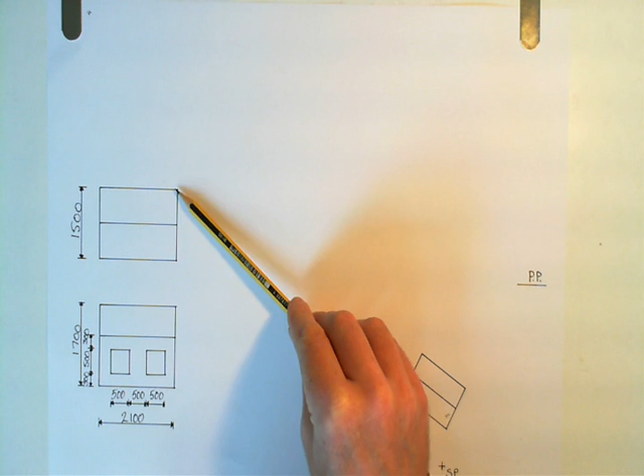So what we've got is a child's playhouse here, 1700 millimeters tall, 1500 millimeters from front to back, and 2100 millimeters from left to right. It's also got a couple of windows on the front, and it's got a gutter which is at 1100 millimeters above the ground. So what we've got over here, this is where we're going to draw our measured perspective.

We've got this here, this is called the spectator point. That's where the observer would be standing if they were looking at the building. So they're standing here, and this is a plan view of the building. They're looking at that corner, looking in on this corner here. And we're going to draw here what that person is going to see in reality.

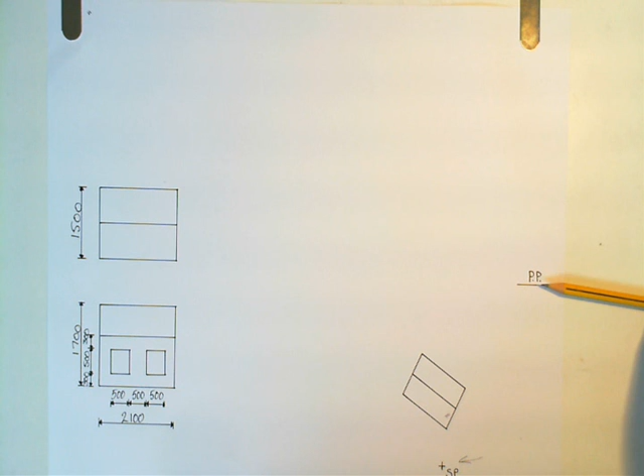We've got a point here called PP, that stands for picture plane. That's probably the most important line on the drawing. That's where all our change in direction is going to occur.

So the first thing I'm going to do with that is extend it all the way along. I take the pencil and extend it along there. It's like a bounce line - there are lines which are going to hit this, and then they're going to go and head vertical up the way or vertically down the way.

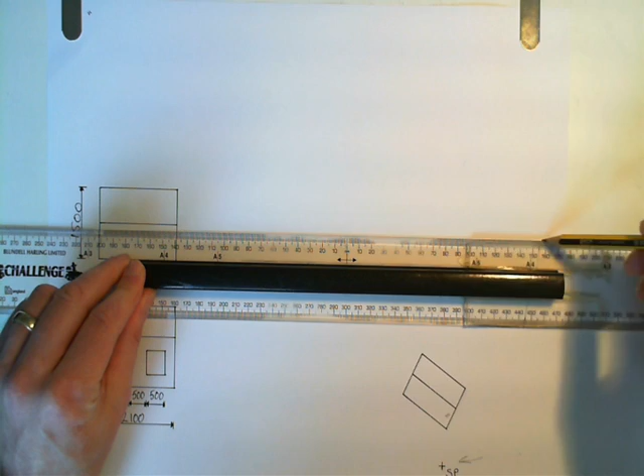Now what I also need is a ground line that I can measure from, and I need a position where my eyes would be. The ground line can be anywhere - it could be up there, it could be further down towards it, but in this case I'm just going to move up a couple of centimetres and draw a line to represent the ground line. Put a GL for ground line.

And the next position that I need is where the eyes are going to be. Now the distance between the ground line and the eye level is quite important - it has a big effect on what the finished drawing is going to look like. In our case we're going to say that the eye level is 1 metre above the ground line.

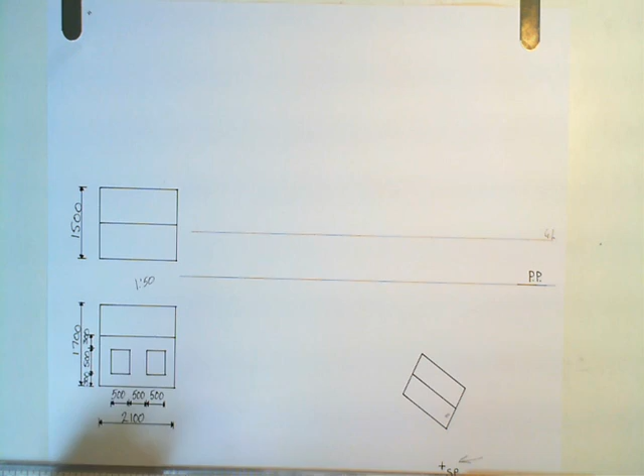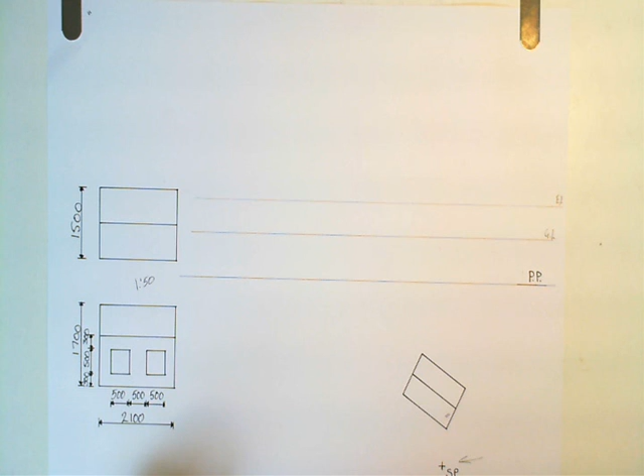This drawing is on a scale of 1 to 50, so what I've got here is a scale ruler with a 1 to 50 scale on it. This is our 1 to 50 here. I've said that the eye level is going to be 1 metre above the ground, so I'm looking for that position. I put my ruler on here, put a little dot at 1 metre, and continue that across the page. And this is my eye level. I know it's a little bit bitty to begin with, but we'll get there.

Here's our house. It's got a side going in that direction, and it has a side going in that direction. They will be two specific angles, and in this case that one is at 30 degrees, which means that this one must be at 60 degrees.

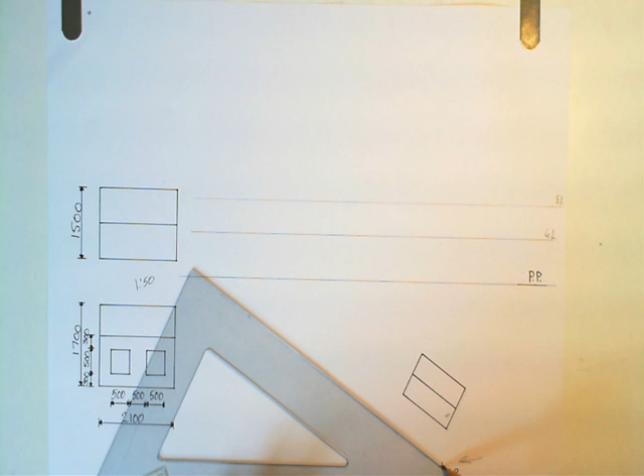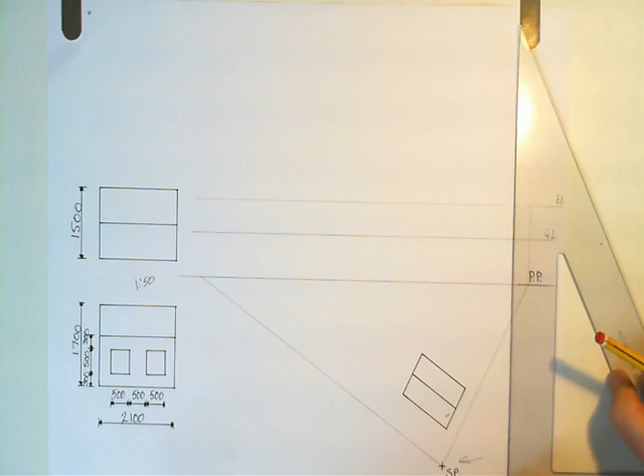First thing I'm going to do is go to the spectator point, very carefully draw a line from there till it hits the picture plane, parallel with the edge of the house. Then go to the other side, spectator point, draw a line till it hits the picture plane, parallel with the edge of the house. Then turn, and I'm going to go vertical through there, and vertical through there. This point here now becomes vanishing point 2, and that point there becomes vanishing point 1.

So we have our two vanishing points, which is familiar since we've used them before. The next thing we're going to do is take height lines, because these are measured perspective drawings, so it's important that we get heights right. We're going to take lines along the edge of the building and fix our heights based on that. It's a bit difficult to grasp, but if you stick with it, it's a routine that works time and time again.

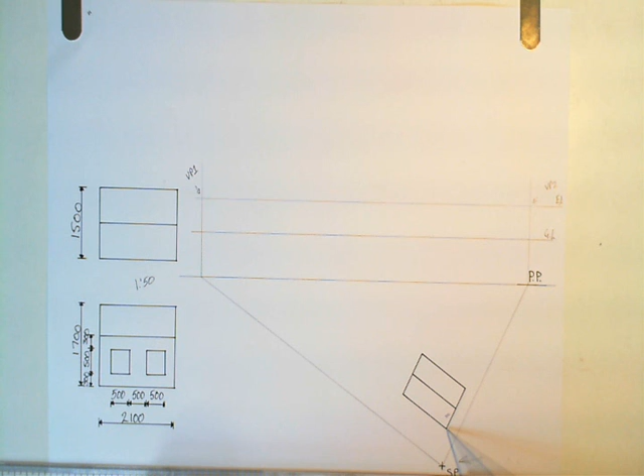The most important of these two height lines is the one that goes along this wall, because that fixes the height of the gutter, the pointy roof which is a little higher, and the gutter at the back. So I'm going to take a line very carefully, touching the edge of the building, hitting the picture plane again, then turning it round along the edge of the building until we hit the picture plane.

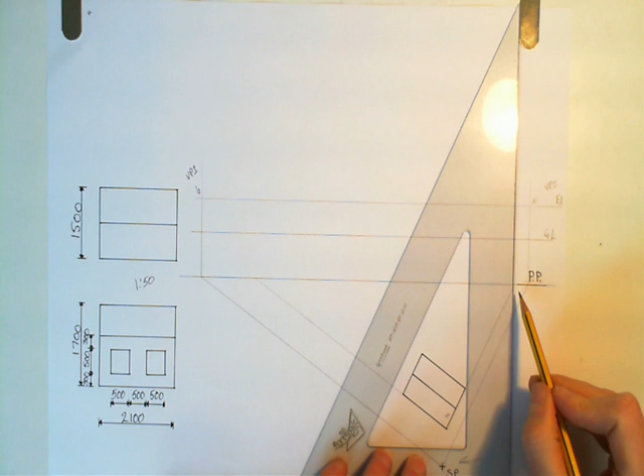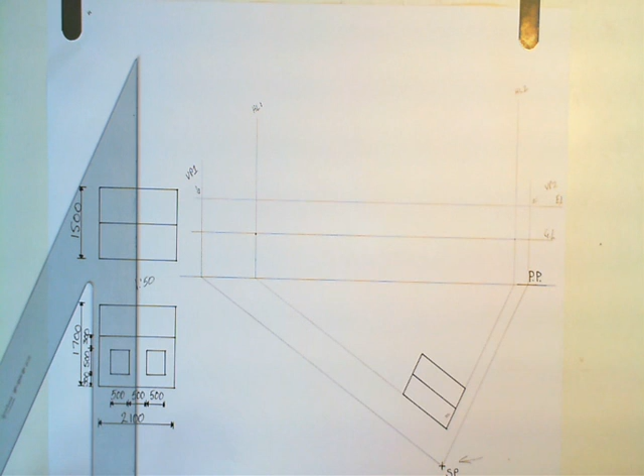Turn my set square round, and once again go vertical. And over on this one, where it cuts the picture plane, go vertical as well. This is ground level here, that's the ground line. This is called height line 1, and this one is height line 2. Height line 1 works with vanishing point 1, height line 2 works with vanishing point 2. You don't mix and match them.

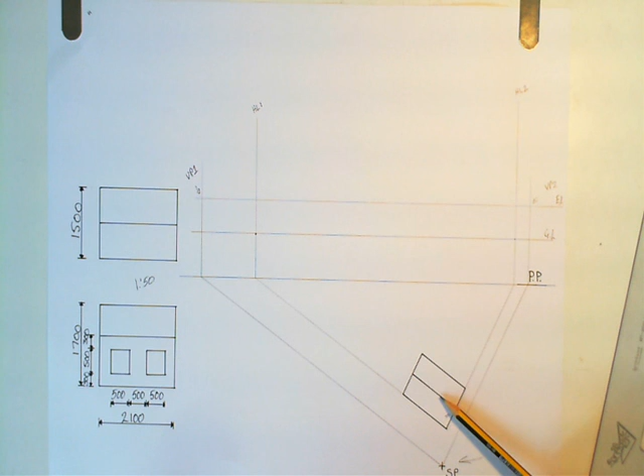The next thing I'm going to do is take these heights which are marked here. The most important ones are the ground, the gutter, and the top. On this height line, it would touch the ground, the gutter, and the top. Notice that this height line along here wouldn't touch the highest point of the building, so that isn't any good for fixing the high point. This other height line does touch it, at that point, so we can use that one.

So I'm going back to my scale rule again. I know the full height of the building is 1,700 millimeters, so I go to my scale rule, set it to the 1 in 50 scale, set it at 0 on the ground line, and then go to 1.7 meters, which is there.

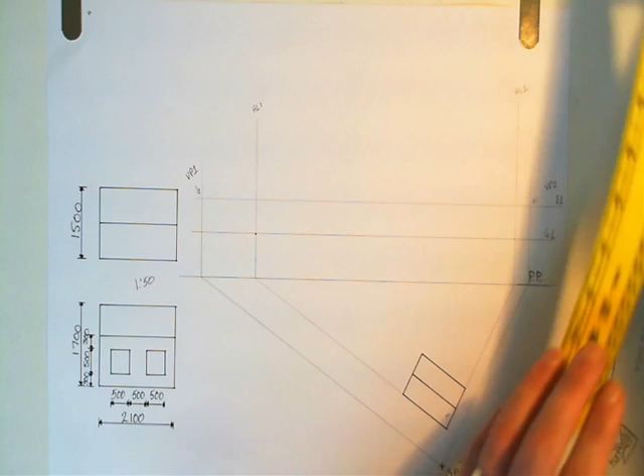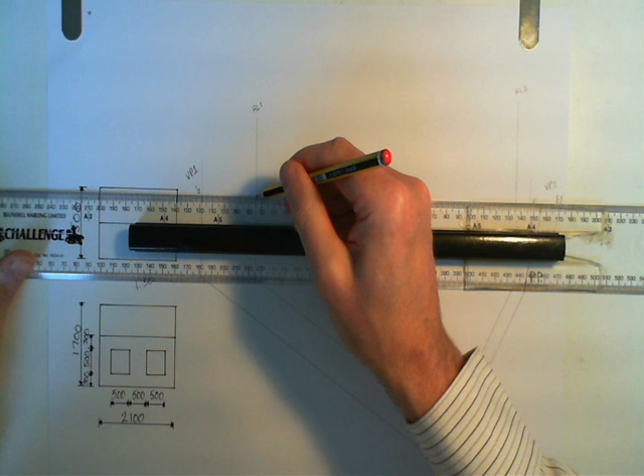I also need 1.1 meters, which is the gutter height. So again, I put my ruler back at 0 on the ground line and go to 1.1 meters, which is just there. Now, to make sure I'm maintaining accuracy, I'm going to transfer that height across from height line 2 to height line 1, instead of measuring, to make sure I get it accurately.

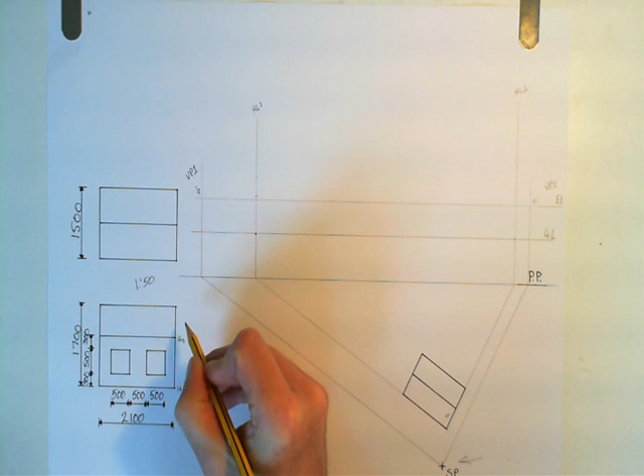Now I could say that this is height 0. I'll skip the bottom and top of the windows, and call them 1 and 2, which makes this height 3 and height 4. So I'm going to mark that on here: that's height 0, height 3, and height 4.

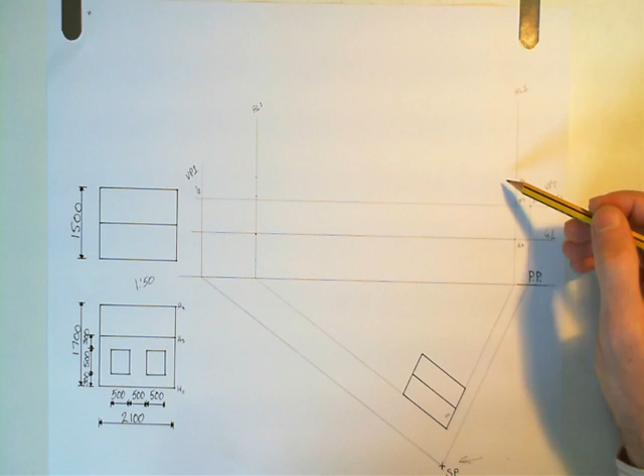Okay, now you just have to try and follow what's going on here. I'm going to vanishing point 1, and I'm going to shoot a construction line from there through the ground line and down into this space. I'm then going to shoot from the vanishing point through that position and off into space here, and from that position through height 4 and off into space there. So I'm beginning to project my lines out in this direction.

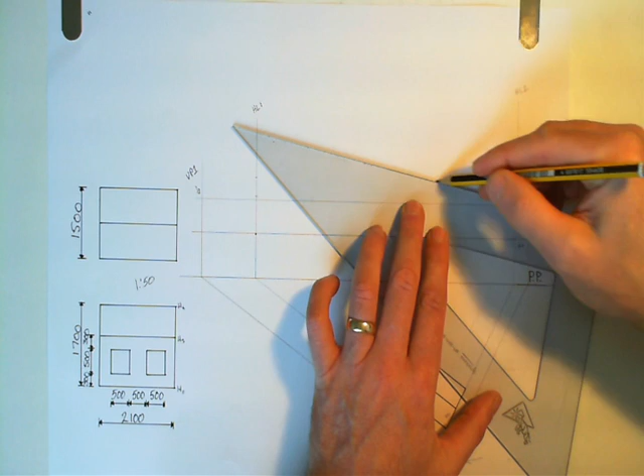Again, I have to be incredibly accurate—even a pencil's point thickness will make a difference. Don't worry if it goes across into the plan, it's just a construction line. Again, being very accurate, across into space, and once again off into space there. So this is the bottom edge of my building, this is the height the gutter's at, and this is the height of the highest point of the roof.